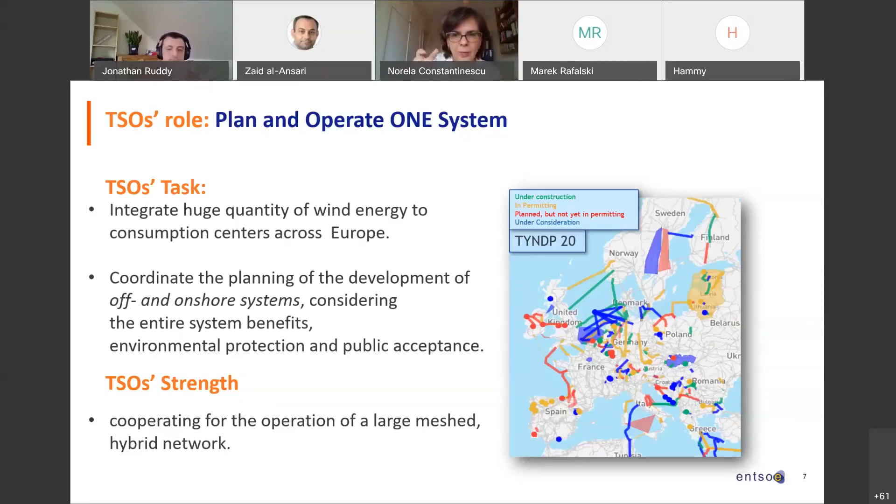I will start by showing the perspective of the challenge which is in front of us. This slide was developed by colleagues in the system development area. You see here what was done in terms of the 10-year network development plan regarding the scenarios, the interconnections which have to be deployed, as well as the offshore wind capacity which we have to integrate. Jonathan, I apologize, it might be needed to press once again to show the numbers. Okay, thank you. So you will see here the challenge expected from the offshore integration point of view.

This is something which is even more enhanced by the European Green Deal objectives. You see the different numbers which are there, some according to the North Sea ministers, for example in the North Sea, but also what was brought by the European Commission through the offshore strategy, which is quite big - 300 gigawatts by 2050 according to Wind Europe, and something like 80 gigawatts by 2030 according to our ENTSO-E scenarios and also Wind Europe's view. Of course, having all these capacities regarding offshore wind around the North Sea, Baltic Sea, but also future developments in the Atlantic and the Mediterranean.

So we have to take into account the grid perspective and the integration. And the systems are not going to be developed from scratch - they have to be connected to the existing systems. Hence we have started the discussion in ENTSO-E regarding offshore grid development, where there are multiple aspects which have to be considered.

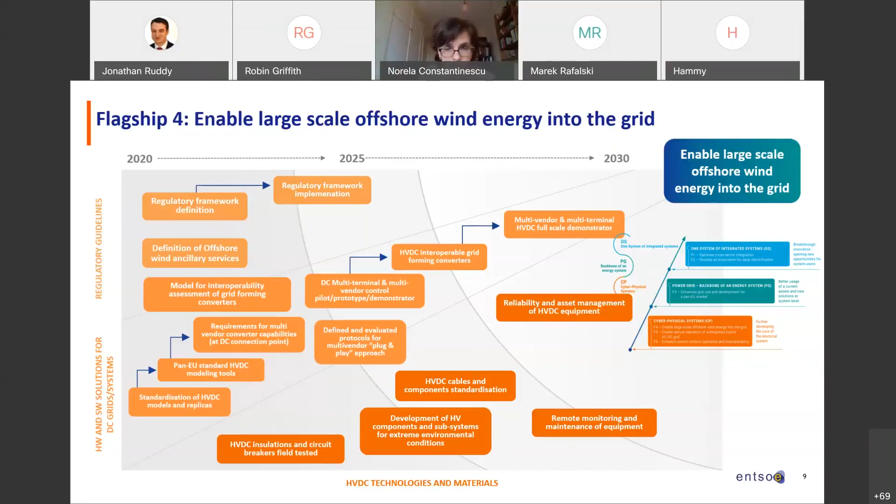So the work was actually rather intense for us. I think it's almost 1.5 years we worked on this, also exchanging with the manufacturers and also with the wind developers in this discussion, in order to break what we call the vicious circle. So on one hand, the manufacturers requiring the specifications to cover the assets capabilities and compliance with the system needs. On the other hand, the position of the TSOs, which cannot draft this specification for multi-terminal, multi-vendor, multi-purpose systems, due to the fact that there are conditions regarding the interoperability, and due to the limited operational experience in these technologies, especially when we have multiple vendors offering the solutions. And then, of course, the question was to arrive to the level of details which will allow to develop such a project.

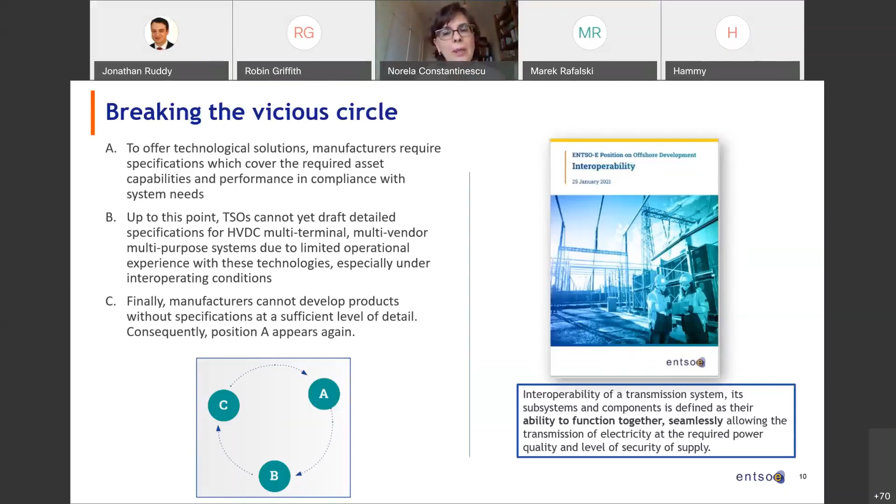If we go to the next slide, after having this discussion, we mentioned that actually, in order to arrive to these developments, which in the future will allow the development probably of a move from radial connections today to more meshed concepts, including in the offshore developments, we need to solve first the interoperability issue. And you see here that there are technical perspectives as well as legal perspectives.

In this trial, we started with research and innovation projects. Some of them were quite big, I would mention maybe Twenties. Then we also went into Best Path, which was closed 2-3 years ago. And the last one, which was in the pipeline of research, development, and innovation projects, was Promotion, which was particularly addressing the North Sea. Although these projects actually required an important effort, and we managed to move certain things in the direction of interoperability, in the end, the success was not fully there.

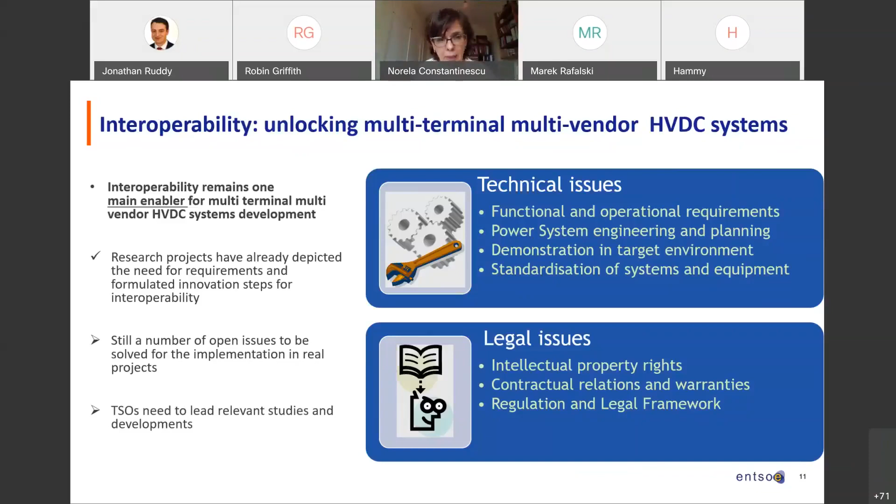If we go to the next slide, another one.

Okay, in the end, after all these discussions and putting forward the issues which we need to solve, we arrived actually at tasks which have to be fulfilled by the TSOs, by the manufacturers, and of course we need also the support of the policy makers. So I mentioned the need for actually adapting the planning approaches, in order to allow this interoperability to take place, so we need to have the real case conditions, and then of course we need to have this planning in the real case condition.

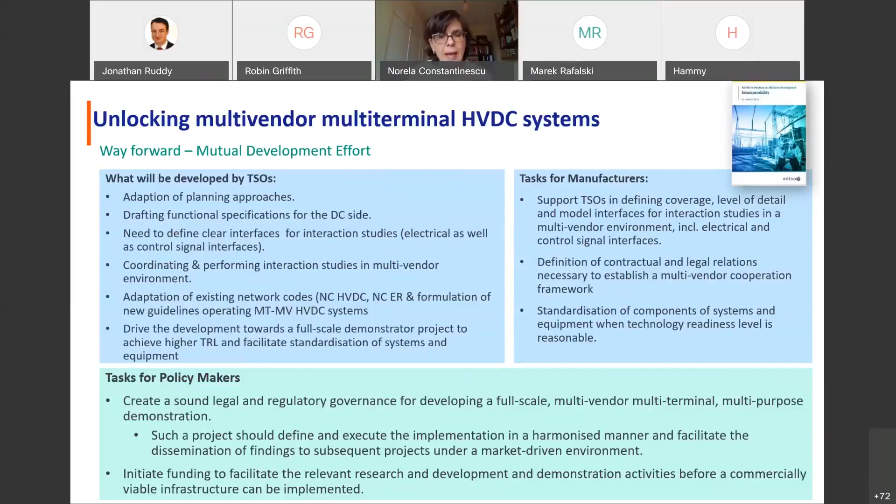Then the drafting of specification on the DC side, and the planning should be there to de-risk the future projects in the conditions of multi-terminal, multi-vendor HVDC systems, the development of rules and requirements, and of course maybe the formulation of new guidelines, then the development towards a full-scale demonstrator to reach the high technology readiness level, in order to facilitate the standardization of systems and equipment to allow for a plug-and-play approach.

From the perspective of the manufacturers, of course, I mentioned the required level of detail and clear interface of models to be used for the interaction studies and pre-studies in the multi-vendor environment. The definition of contractual and legal relationship in order to establish the multi-vendor cooperation framework, and in the future standardization of the components and equipment when technology readiness level is reasonable.

From the policymakers, we actually push the idea that we need to have a sound legal and regulatory governance for developing such a full-scale multi-vendor, multi-terminal demonstrator. And I think in Europe, the offshore strategy recognized this need in a well-covered way. And of course, in order to arrive there, we have to take a stepwise approach.

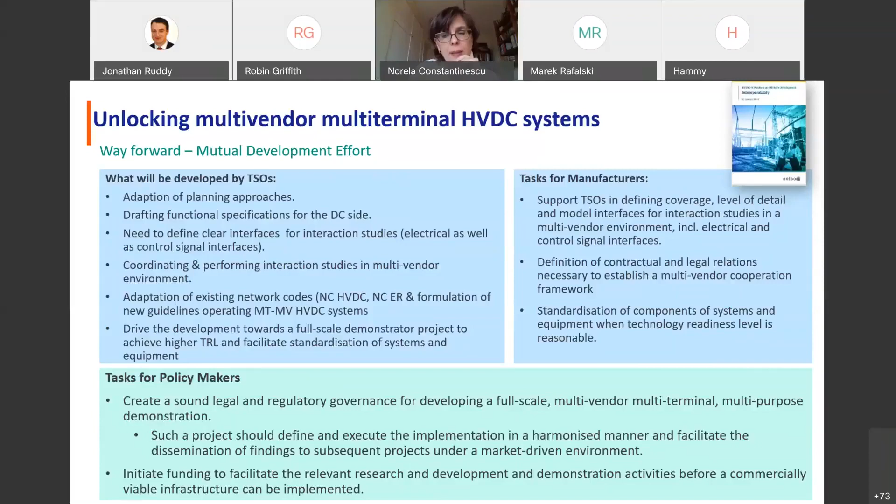Starting with the relevant development and demonstration activities before going to commercial viable infrastructure. If we go to the last slide, all this we do to move from today's situation to tomorrow's perspective, where we will have hybrid projects development. When I say hybrid, I mean an interconnector plus the connection of the wind farm, and this idea of arriving at a multi-terminal, multi-purpose development in order to open up the development of a potential meshed offshore grid for integrating those amounts of huge offshore wind developments I have shown on the first slide. So interoperability is important, and it's for the moment seen as an implementation risk for the TSOs, and hence we would like to move forward and have the de-risking of such a solution. Thank you for your attention.

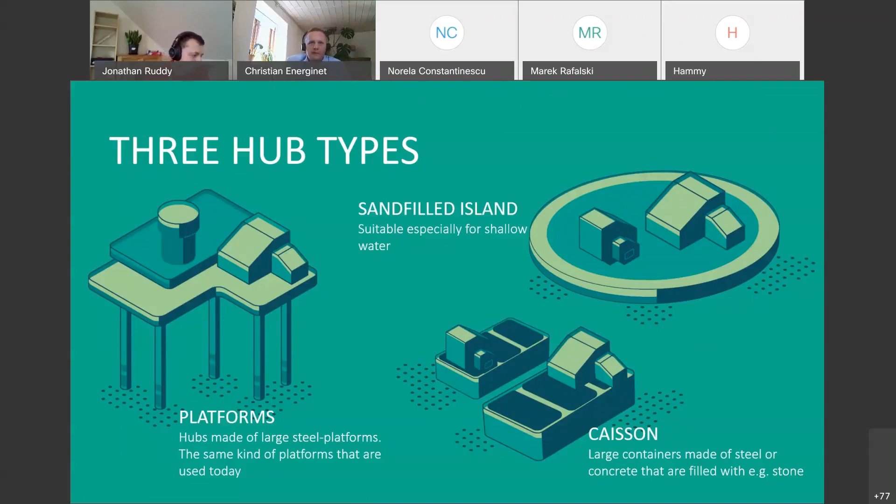The caisson has been chosen for the North Sea, and this will be the first artificial energy island in the world. It will be situated approximately 80-90 kilometers from the peninsula of Jutland. Again, it has to be done within time, meaning that specifications have to go out in 3 to 4 years for us to fulfill the time requirement.

It's a significant investment, the largest in the history of Danish construction—28 billion euros. This includes the 10 gigawatt wind farms, electrical installations, and power cables.

A bit special about the island is that it will be a public-private partnership. I think public owned 51%, and then the rest by private. So this is also a new way of doing this in Denmark. Next slide, please.

The idea is that the first 3 gigawatts will be constructed as an electrical landing facility, either AC or DC current. The idea is then later either to install Power-to-X plants on the energy hub itself, or to land the energy by electricity and then transform it onshore. So the whole Power-to-X concept is thought into the idea from the beginning, but the first stage will be an electrical hub only. Next slide, please.

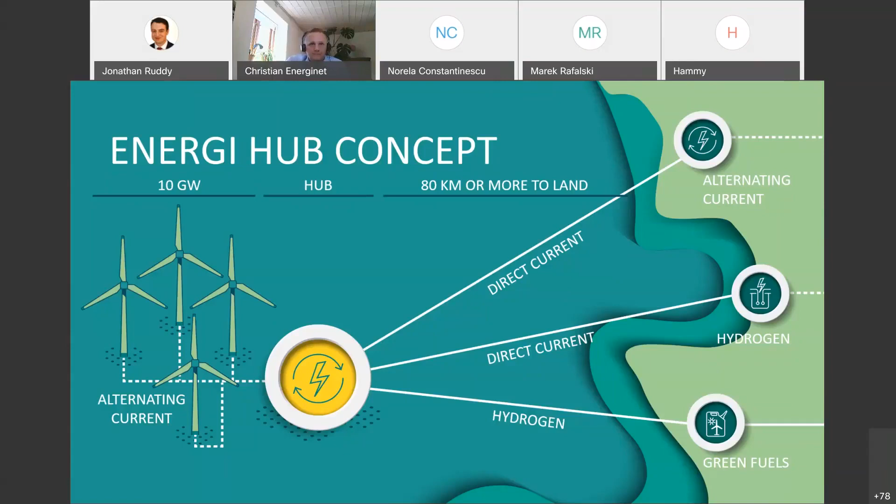So as I mentioned, this is the vision for the European North Sea series of interconnected energy hubs that somehow starts us developing our offshore HVDC European system. So the start of something that will be very, very interesting to follow over the next 10, 15 years. Next slide, Jonathan.

The next slides show the innovation needs and technical challenges seen from a system operator's perspective, especially the electrical system operator. The gas colleagues are also involved in the project, but this is a focus on the electrical system design. You could say this hub is an extreme version of the future inverter-based power system, so this is a unique opportunity for us to gain skills and to learn, to share experience.

If we follow the time plan, which we of course intend to do, then in '33 we will have been through the planning, through the design, and we are able to actually measure the electrical performance of this island. So there's significant learning that will help de-risk future offshore energy facilities. This is something very, very interesting from an innovation point of view.

What we are responsible for at Energinet is to construct the offshore power system, the landing facilities, and the interconnectors together with neighboring partners. It's of course also to establish the technical and regulatory framework to support this. Next slide, please.

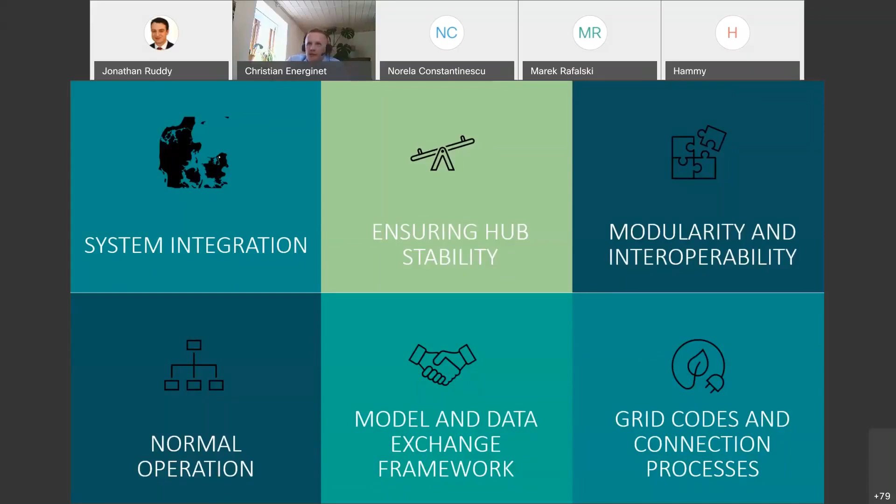So we are now in the stage of evaluating from an economical and technical perspective, with the boundary condition that we need to be able to expand it in the future. What is the optimum configuration we should select for these energy islands? Is it the same for both of them, or is it different?

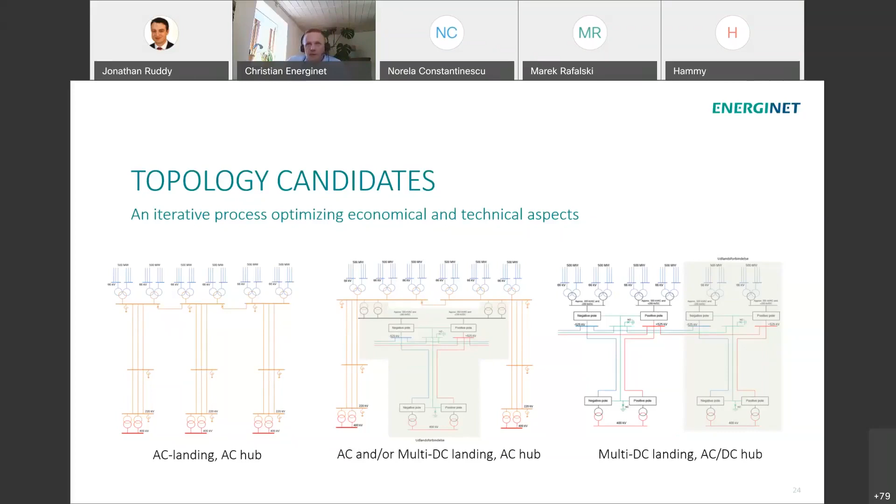You can see here already that these decisions on technology, AC or DC, will have huge effects on what sort of innovations and issues we need to challenge. Basically, on the left, you have single HVDC systems, with the connection on the AC side on the island. Here you have to control what is an AC offshore power system using some sort of hub master controller that has to be developed.

Here, interoperability between HVDC systems will also be highly relevant, because you have very closely interconnected components in a very weak AC system. So you have all the components for controller interactions and many phenomena that need to be addressed on such a high-risk offshore system.

On the right, you have moved the hub connection between the different HVDCs to the DC side, and hence started the multi-terminal system, because we need to expand this to 10 gigawatt and maybe also connect to future hubs. This needs to be a multi-vendor system for us, not to be locked to one vendor. So we need the multi-vendor, multi-terminal system to enable the right choice here on the figure.

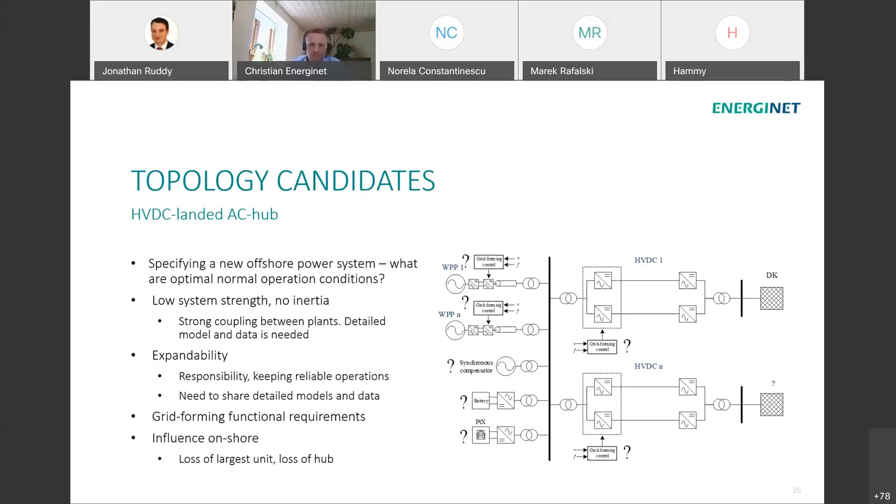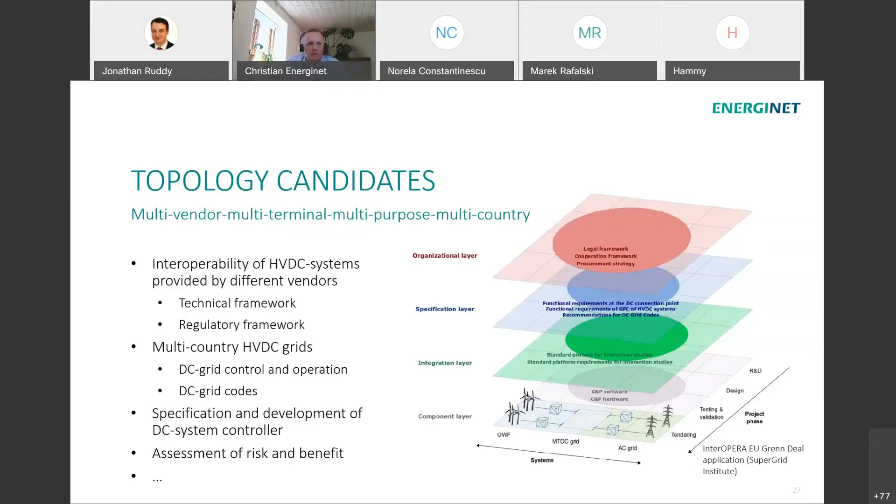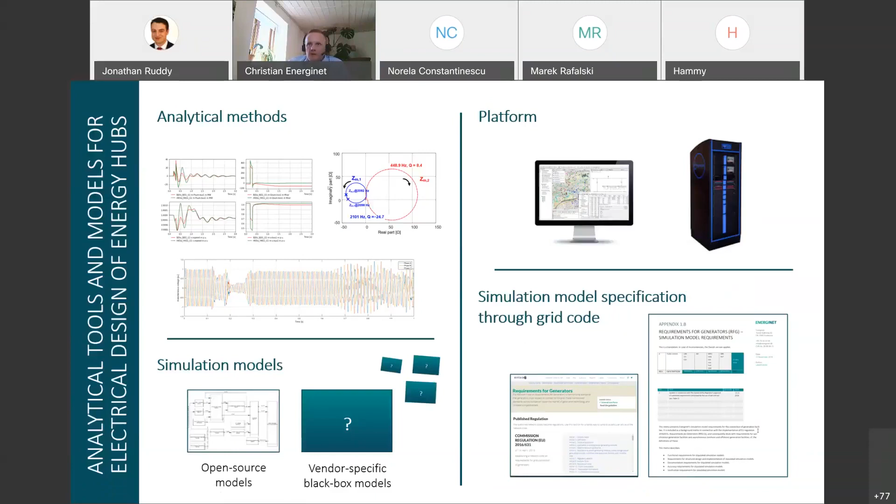So thanks, Jonathan. Could you just change slides? So this is the last slide. Thank you for your attention.

Thank you, Christian. That was great. I think maybe we have time for a couple of questions, and there were a couple that came through in the chat. Maybe one from me first.

I'm just thinking about the design choices you talked about, especially whether you have AC interlinks or DC connections between the 2 or 3 HVDC links. Is that design choice on you, or is that design choice on the developers of the offshore system? Energinet, as the system operator, has been given the task to design the landing facility - to design a landing facility for 3 gigawatt that enables modularity until 10 gigawatt, and within that boundary you have to find the optimum solution.

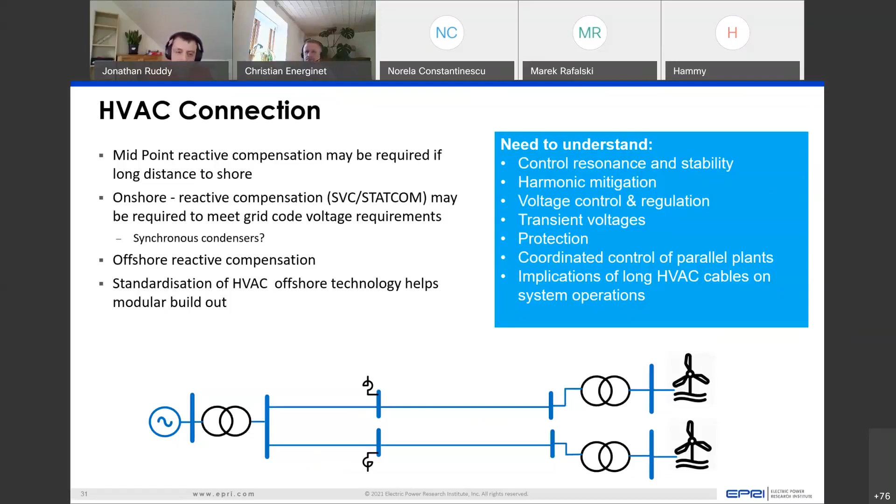Another aspect to speak about, maybe just briefly, is the impact of common mode failures for AC connected offshore wind farms, or even DC connected offshore wind farms. So you have an event like the Hornsea event that causes maybe multiple offshore wind farms to react in a similar way. How do we plan against that? What models do we use to define the standards for that, and how do we try to mitigate against that happening? Those are all topics we're really interested in researching here at EPRI.

It's been done in Germany quite a lot. But as we start to add more parallel links, we still need to understand stability in the offshore network, 100% inverter offshore collection network, what's the impact of multiple parallel DC plants on the onshore side, interoperability on the onshore side as well as the offshore side, and trying to avoid control interactions which are possible through the system.

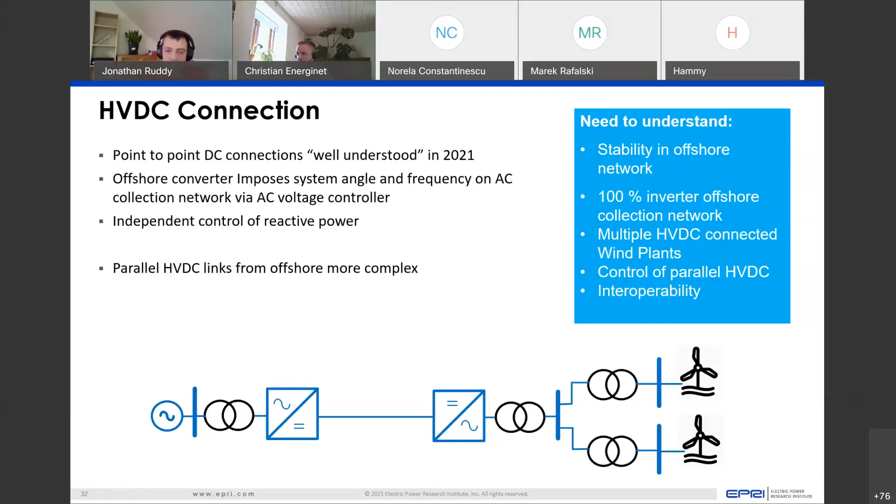All of these problems that may be solved or may be caused by control can also be solved by control, and it's just about having the proper foresight and proper models and proper studies to appropriately model everything and try and figure out what's going to happen in the system.

There has been a huge push recently, in particular some really good studies, toward a coordinated offshore and onshore approach, and I think that's obviously where Energinet are also headed with the offshore grids. National Grid ESO produced an offshore coordination study a couple of months ago. It was a really good study, and I think maybe some of the authors might even be on the call. So I'm not qualified to speak about it, but there's three or maybe four points that I wanted to pull out that really struck me.

According to this analysis, if they began their integrated planning approach in 2025, that's an 18% cost saving for the onshore and offshore infrastructure, corresponding to about 6 billion. But if they waited until 2030, that reduces to 9% savings, because of the 5 years intervening in which there will be AC or DC connected point-to-point offshore wind plants.

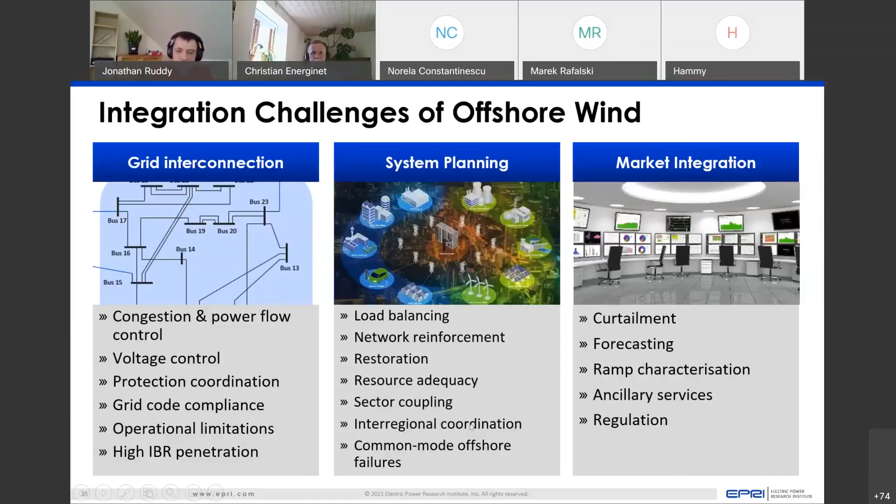So that's the challenges. I wanted to talk a little bit about the innovations. Christian mentioned a lot of those, and he mentioned that the offshore grid is an accelerated version of where the onshore grid is headed. I think we can learn a lot from the offshore grid in terms of what happens onshore, especially with grid forming inverters and mitigating control interactions. There's a lot that is required there.

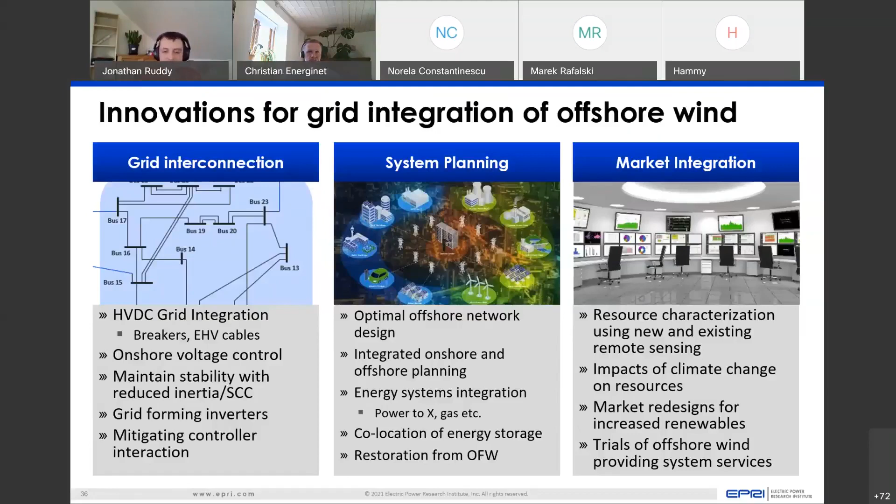I don't want to spend too much time on this right now because I know people are still interacting with Padlet, so I'll just do a quick shout out for that again. If you weren't with us at the start, we're using Padlet as a whiteboarding tool to try and get your innovations required for offshore wind on the system. You can interact with Padlet there, add more challenges or innovations as you wish. We'll come back to this in the Q&A session and maybe put to some of the speakers what we've seen and what's maybe been the most popular topic from the crowd.

So I'll take the final few minutes and just speak very quickly about what EPRI are doing in terms of the integration of renewables and R&D, and what we're doing in particular on the frequency inertia side of things.

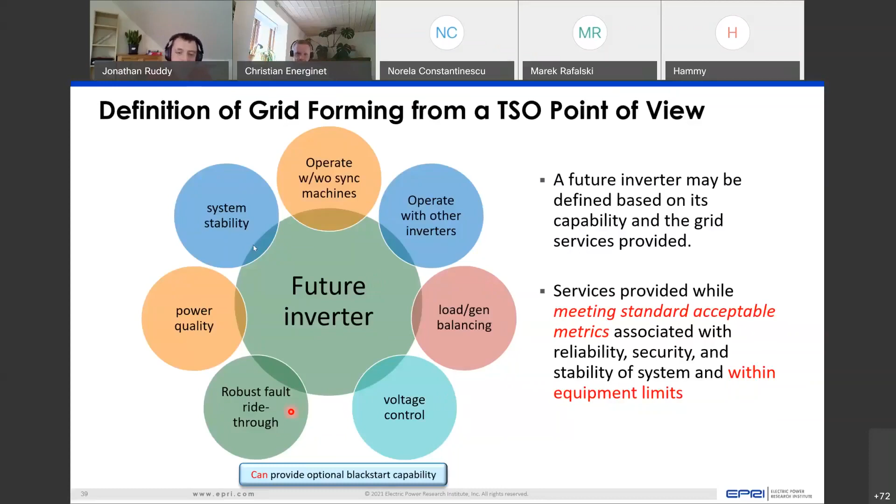Some ongoing relevant R&D at EPRI - on the grid forming side of things, we have a really good grid forming tutorial. My colleague Deepak Ramasubramanian put together a really good and publicly available tutorial for grid forming inverters. Anyone who's based in a TSO should be interested in that. I think somebody's going to put the link to that into the chat now.

We've been involved in the development of generic models for planning and for operations over the past number of years, and we've been working on stability of AC connected offshore wind plants, fast frequency response, and 100% inverter systems. A lot of work recently on 100% inverter based systems, and something we're continuing to work on, in particular through the modeling and planning timeframes, but reaching into the operations timeframes as well.

So there's a number of R&D projects which are of real interest in those areas, and that's just the tip of the iceberg. We're also working on restoration with renewables, protection, system integrity protection, and control center of the future, which are all relevant to integration of offshore wind.

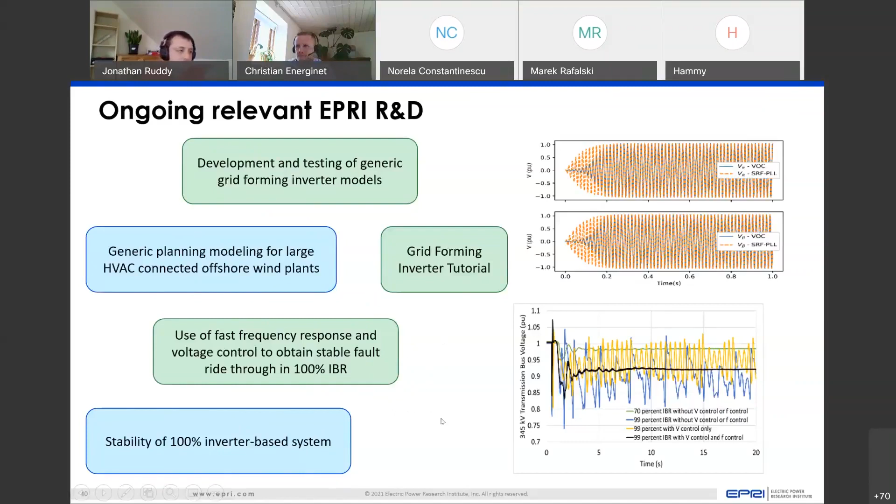So I wanted to speak very briefly about some upcoming projects. In our operations and planning, transmission operations planning department, we're working on reducing grid strength and short circuit current. On the grid forming side, we've done a lot of work over the last couple of years, and we're actively seeking collaboration on a demonstration. If there are people interested in working on that, through European projects or other means, we'd be very interested in talking about that.

One aspect I haven't seen talked about too much is network reductions for dynamic studies, how to reduce the computational burden of the system while maintaining its dynamics. We're also working on HVDC integration, onshore and offshore.

One interesting project we're starting with our LCRI team, the Low Carbon Resource Initiative at EPRI, who you may have heard from yesterday, is the co-location of electrolyzers, wind, storage, DC and AC connections. That's something which will be of big interest, I'm sure.

And again, as I mentioned, restoration from renewables. So that was a 15-minute whistle-stop tour of what EPRI is doing on grid integration of renewables, particularly offshore wind.

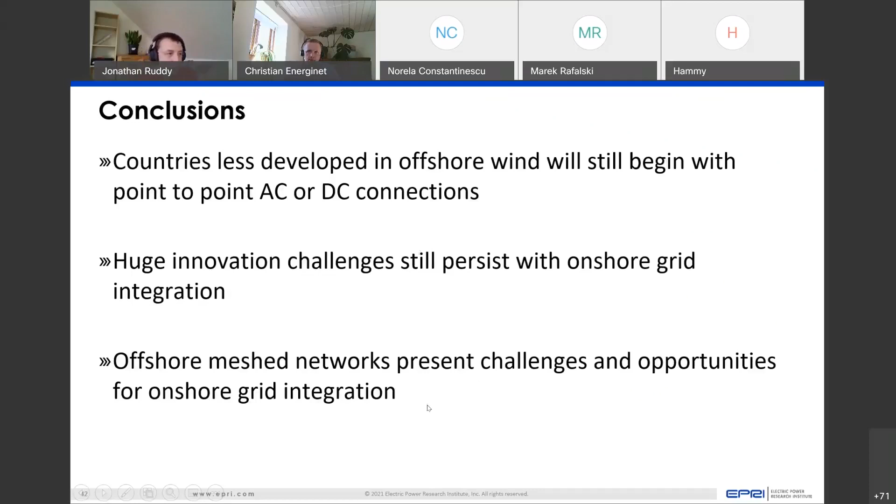At EPRI we're very interested in continuing to work on this, and if you want to get involved there are a number of ways to do that, from joining a working group or an interest group, which is the base level, maybe having one or two calls per year, right up to getting completely involved in a collaborative R&D project with us. So there are many ways to get involved, and we'd be interested in hearing from anyone interested in the things we've talked about this week.

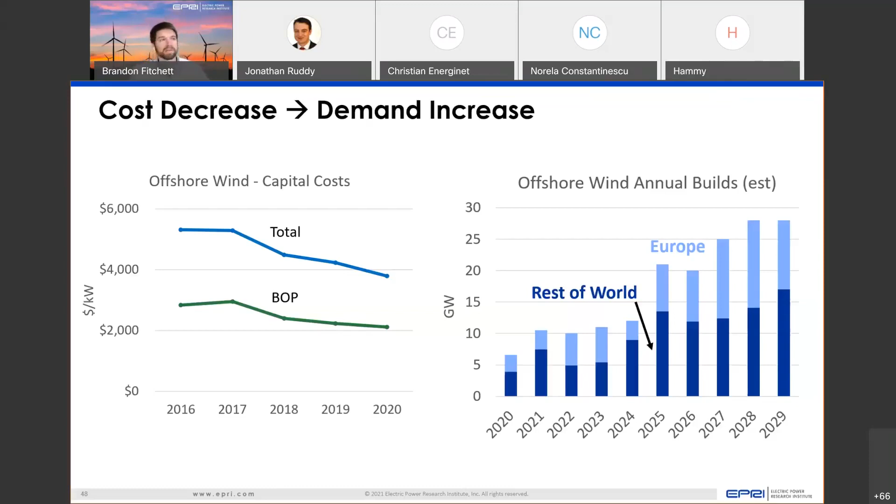Similar situations are occurring onshore as well. The buildouts onshore are nearly double or triple that projection for offshore in terms of new builds. This has really led us to look at a different aspect of this energy transition. It's a transition within the transition.

There is a transition towards renewables in the whole power system as a whole, the generation assets. Part of that is economics, as I just presented. Part of it is policy driven. Sometimes there's a mix between the two, one claiming to be the other.

The transition within the transition I'm referring to really has to do with a drastic amount of renewables, which will be the source of generation in the future power system. A lot of these renewables assets and the specifications around them are designed around the economics aspects, and some of those historically were not designed with the entire power system in mind, especially at the extremes, and I'll get into that a bit.

For these reasons, where we see this energy transition, we brought together experts from around the power industry - generation, wind turbine designers, grid operators and planners - and laid out an R&D needs roadmap for this power system of the future and how renewables fit into it, with some of the questions being: what is going to be needed from these renewables plants, and what is going to be the impact on these plants? How do they need to be designed differently to be operating differently out in 2030, 40, and 2050?

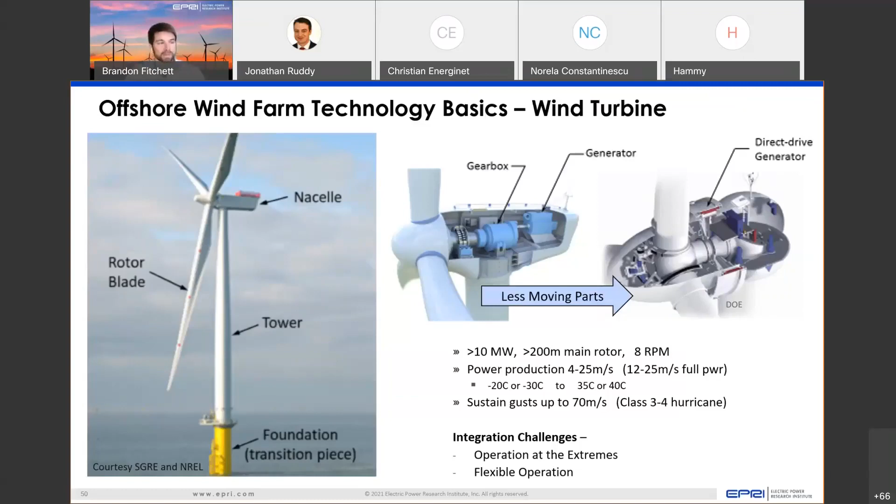The challenges here are really operations at the extremes in terms of the operations of the wind turbines themselves, as well as flexible operation - I know Jonathan alluded to that. There's a lot of automated operation that can happen around frequency response - that's usually a quick curtailment due to high frequency. The other option is uprating due to low frequency, and that can happen too. It's just not utilized - there's a lot of things here that are not utilized that could be. So some types of flexible operation like that, as well as operations at the extremes.

I just have to plug this real quick - this is part of the cost reduction efforts mostly, but it is also looking at the grid, some of the grid impacts and some of the electrical operational environment impacts on the wind turbines at sea. We are looking with DTU in Europe as a lead on this. We're involved in a project called HIPERWIND, funded partially by the EU government, and the EPRI role here is looking at effects of grid events on the generator and drivetrain. I know we've seen some in the UK - again, Jonathan alluded to some of that as well.

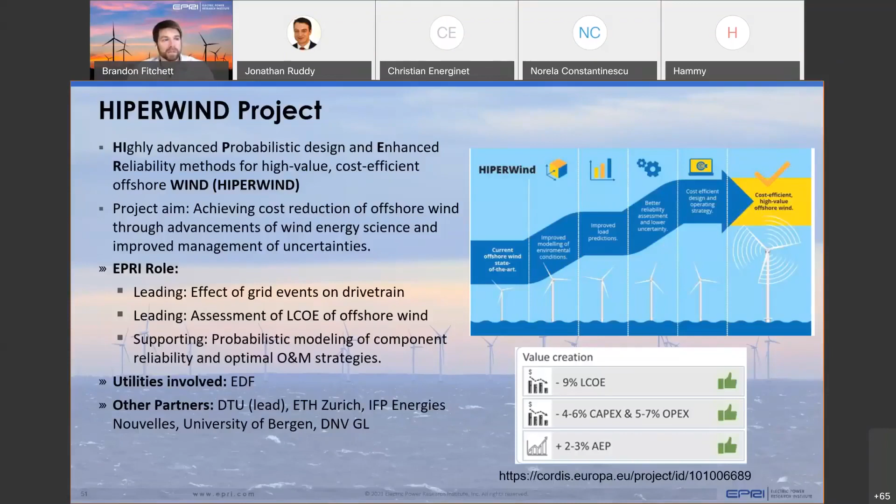Looking at the different responses needed from the wind farm is going to have some impact on the wind farm. Some are beneficial to the life of the wind farm. Curtailment typically will help extend the life of certain components, but transients will not, startups and shutdowns will not. So we're going to look at a lot of these different control regimes of the future to better fit these plants into the power grid and see what is the impact on the machines of operating them a little bit differently than they are today, where they are operated to extract as much power as possible.

So that brings up the challenge of the grid environment impact on the plants themselves. Starting to look the other way, at how the plants see the power system, how the plants feed into the power system.

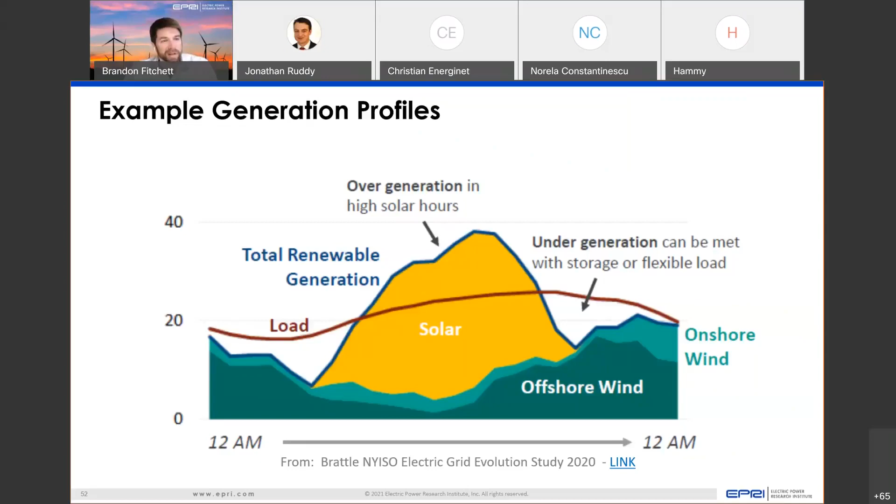How do you fill those gaps? I think that's the challenge. And what do you do in those extreme situations when you may have either zero solar or low solar and low offshore wind for a day? How long are those gaps? What do you need to plan for? So I know that's part of the planning, the resource adequacy aspects of this group.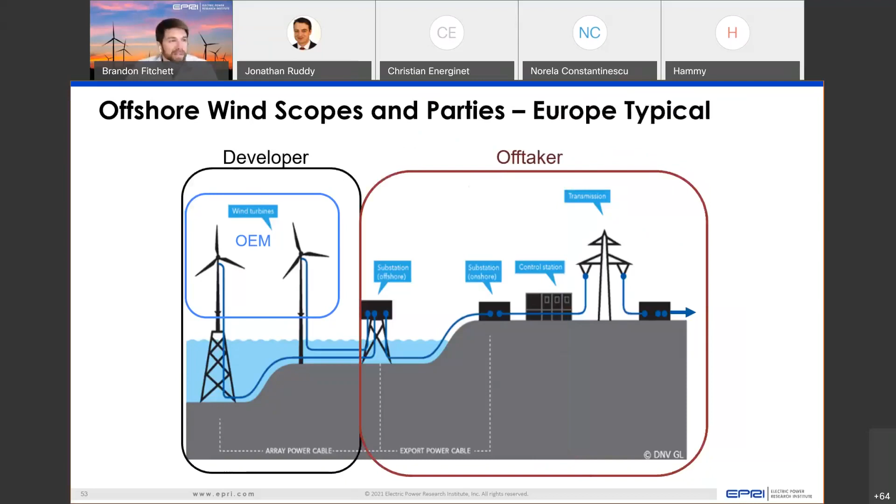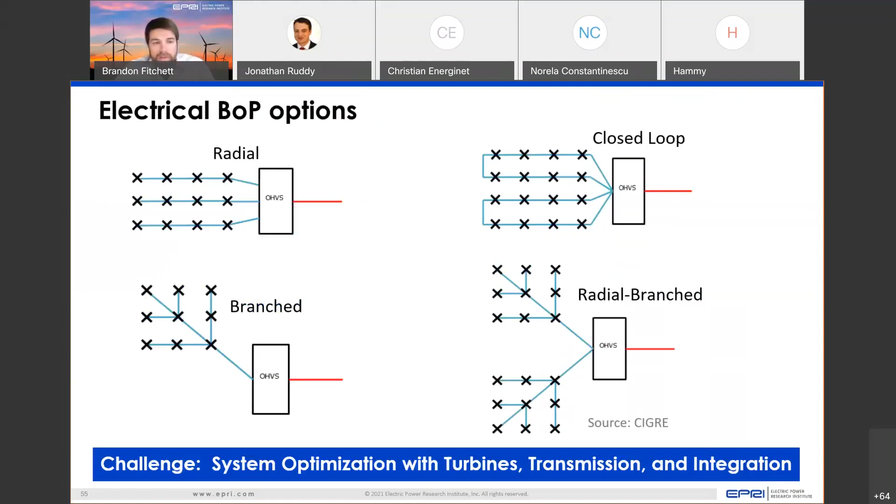Just imagining changing the operational specs of the turbines definitely requires the OEM collaboration. And changing the voltage of the collection system requires the developer and probably the off-taker to really collaborate. So looking through the collaboration opportunities, we are just at the beginning of doing that internally at EPRI, and we're working with other folks externally, like numerous people on this call. But it's going to take a lot more concerted studies around every group involved to really come out with a more optimized system here. So really appreciate your time here today.

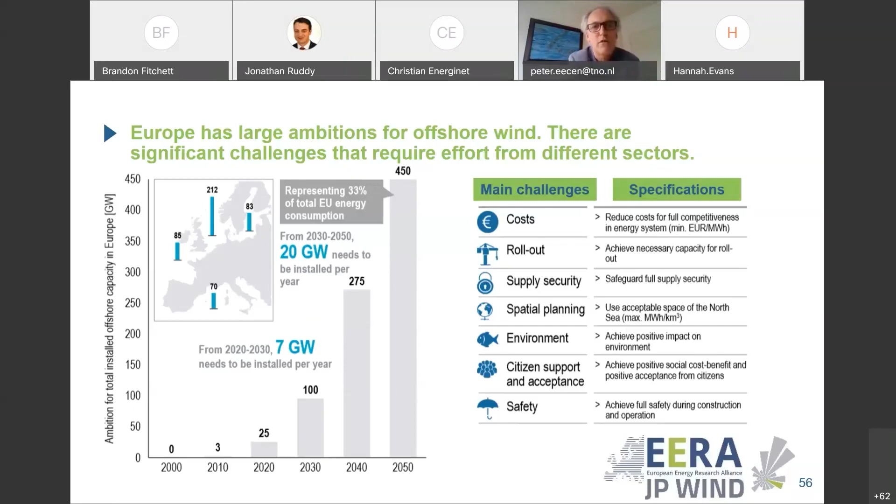Research spans different fields, and this really requires a mature research and innovation system with high-TRL research and innovation working together with low-TRL research, shaping a research community that can support the European industry. Europe is currently number one in wind energy worldwide, and we want to remain in that position, and the home market will be huge.

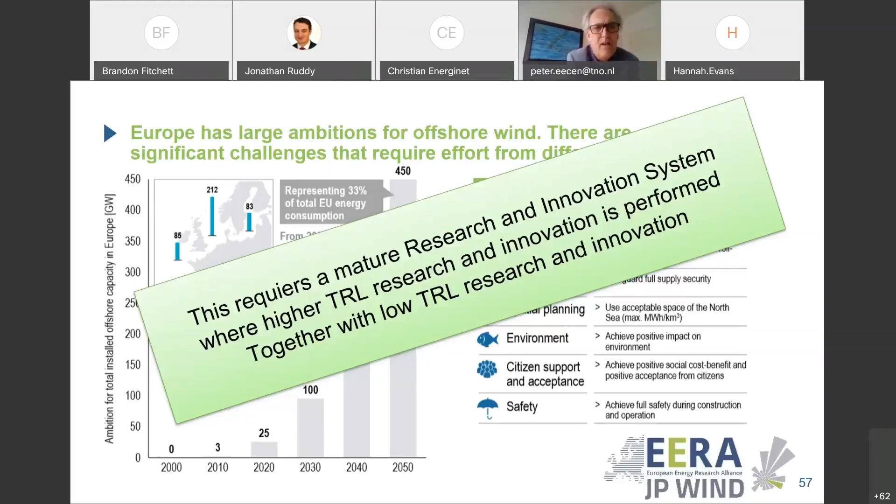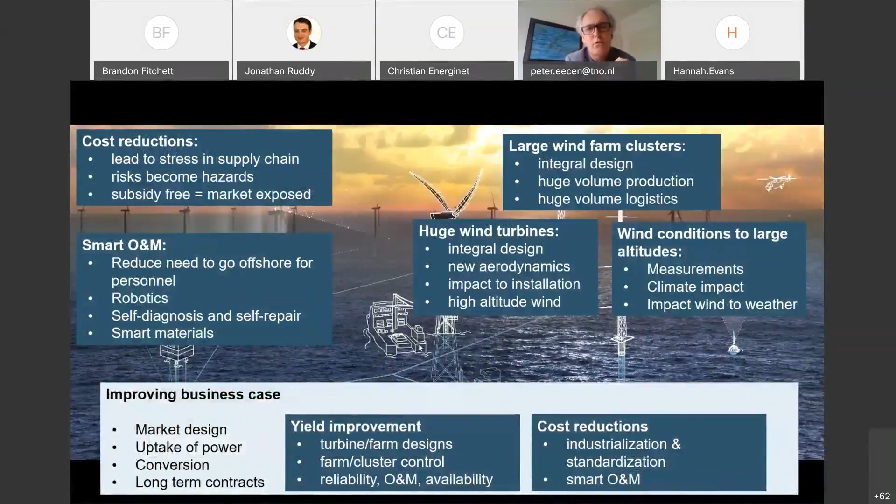I included these slides, but I'm afraid they have a bit too much information. Still, we aim for cost reductions, mainly achieved through large wind farm clusters, especially offshore, with huge turbines. Turbine size increases so we capture wind conditions at larger altitudes, and that is a main driver for cost reduction.

We also need to improve the business case of these wind farms. You build a wind farm now, and all the costs are now, but you need a business case for the next 20 to 30 years. You want to know if you can still sell your power at a reasonable price in 20 or 30 years, when there's much more wind in the market, in order to earn your investment back.

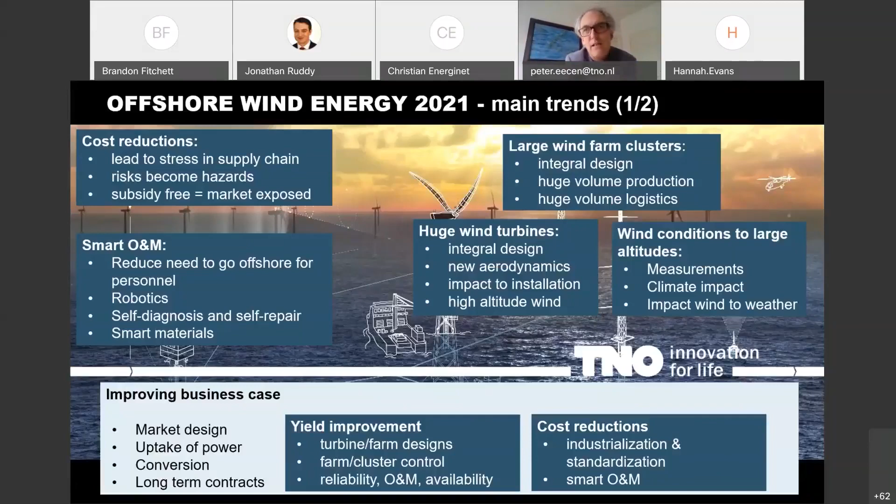The next question is system integration, which we've talked about a lot today. For example, one question that came up: is it bad when a wind farm disconnects as wind speed increases above 25 meters per second? It used to be an economic question—it's possible to operate wind turbines even in higher wind, but it comes at a cost.

So at what moment do you solve this issue? Is it solved using, for example, energy islands, as mentioned by the first speaker, where multiple wind farms are connected and probably not all disconnected at the same time—would that provide enough damping to satisfy the system? So there's a systematic approach needed to the energy system, impacting not only wind turbine and wind farm design, but also the offshore energy infrastructure. I call it energy infrastructure because it's not just electricity, but also hydrogen or other energy carriers.

We can expect some breakthrough technologies, and that's the exciting part of lower-TRL research. There are some interesting candidates, but none yet with a business case much better than our standard horizontal-axis three-bladed offshore wind turbine, which tends to get larger and larger. But we keep exploring the opportunities.

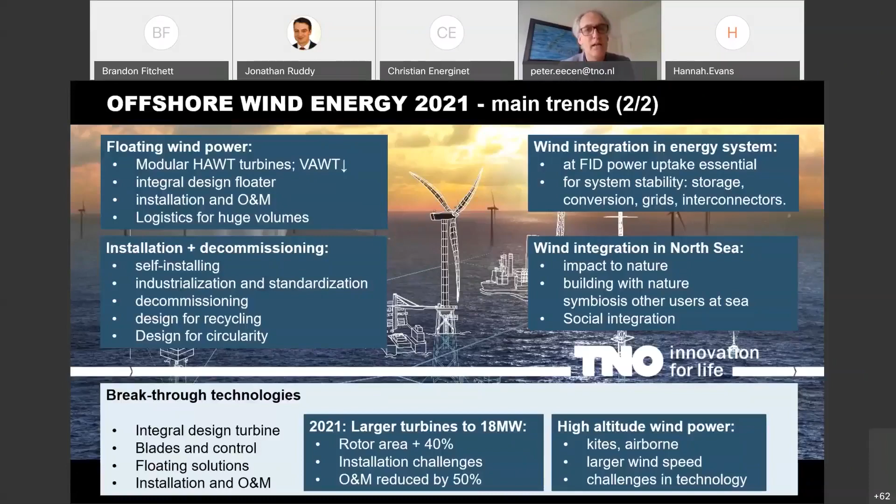Next slide, please. For the sake of time, I'll skip this one.

From the EERA perspective, we collaborate a lot with ETIP, the industry platform in Europe, and the European Academy of Wind Energy. We see that currently there's a lot of focus on higher TRL, almost demonstration research. In order to remain number one in technology in Europe, we also need this broad range of TRL levels, and we are pushing the Lighthouse Initiative.

SETWind is the SET Plan Implementation Working Group for Offshore Wind, consisting of countries that try to collaborate with their national programs in a collaborative way to strengthen the European research arena. So what is a Lighthouse Initiative? It's relatively low TRL, long-term and large, inclusive of many different partners across many countries. In that sense it's broader than a project, and it should help further improve the technology readiness level required to shape this 450 gigawatt offshore wind sector.

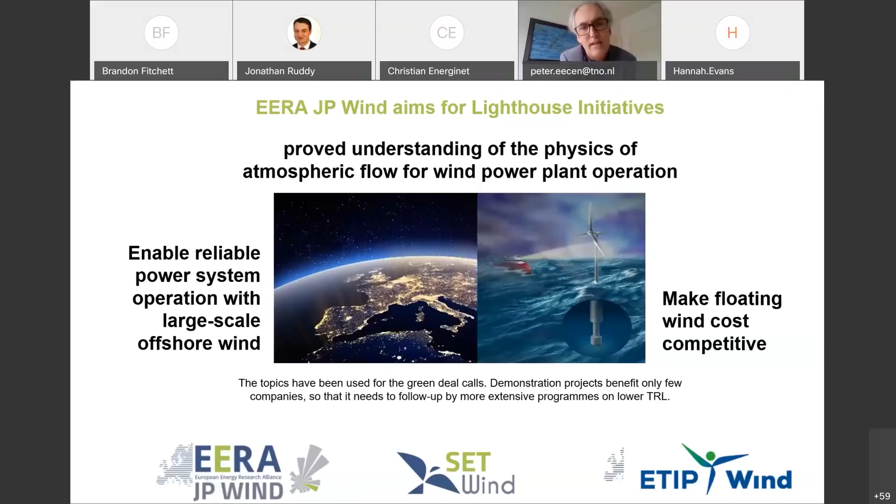So, next slide, and I can wrap it up more or less. We have made an initiative for three lighthouse initiatives, and that provides great opportunities for the industry, for employment, for the innovation system, to remain our number one technology leadership in the world as Europe. What we express is that we need an innovation system that has low, medium and higher TRL research.

You can find it in these three R&I strategies. The first one is from the EERA Joint Program Wind, so the research institutes and groups in Europe. The second is from the European Academy of Wind Energy, which is mostly the universities, focused on long-term research objectives. And the last one is the ETIP Wind Strategic Research and Innovation Agenda, focusing a bit more on higher TRL, shorter term research objectives.